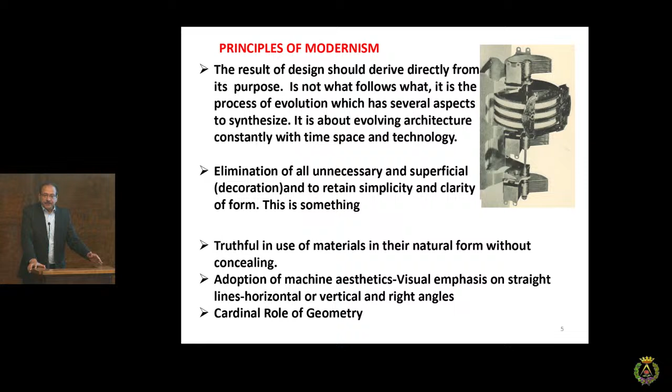Modernism, in very simple words, means we eliminate what is not required, we build only what is important for human comfort and human values. Humanity became an important tool rather than the iconography, rather than the image of a building, rather than putting my name on the building—it was the human comfort. And that became important after the war, when we suddenly realized architecture must shift into a more balanced proposition.

This man—incredible—each time these modern masters walked in Chandigarh, a lot of questions people ask me, so I will try to answer your questions. I have only 30 minutes.

They used to work in a tent outside. At the time, it was all village. A lot of people ask me where did they work—they worked in the tents. All the drawings of Chandigarh were made in his Paris office, and the Indian architects translated his drawings into construction drawings.

I must also tell you, at that time there were no computers, no RMCs, no mixed concrete. So those images of a 5-story building with a ladder and a lady carrying molten concrete on her head to the 4th floor, dropping it sometimes with a child on her back, are amazing.

When you see a building, you see it in its time frame. You appreciate the times it was built. And Chandigarh, of course, is timeless. But I need to tell you what makes this so important, even today.

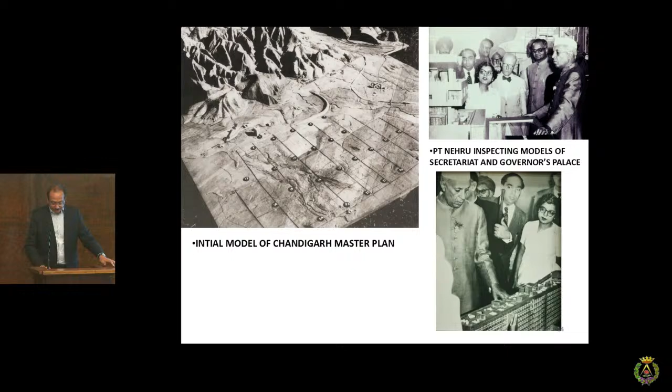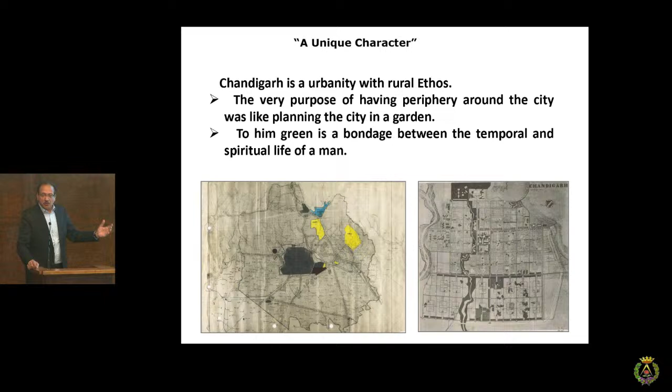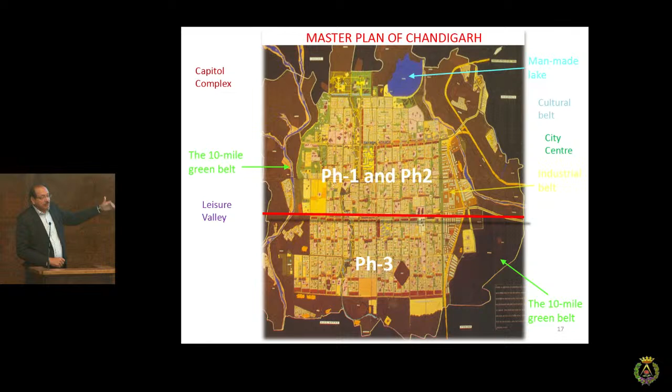Architects are not builders, they are visionaries, and I'm so blessed to be in this place where this college has given so many visionaries. He knew the importance of growth, and he wrote it in his books, the Edicts of Chandigarh, how the expansion must take place. So therefore, in spite of all this expansion, there is no chaos, there are no roadblocks, there is no energy wasted when we travel on the roads.

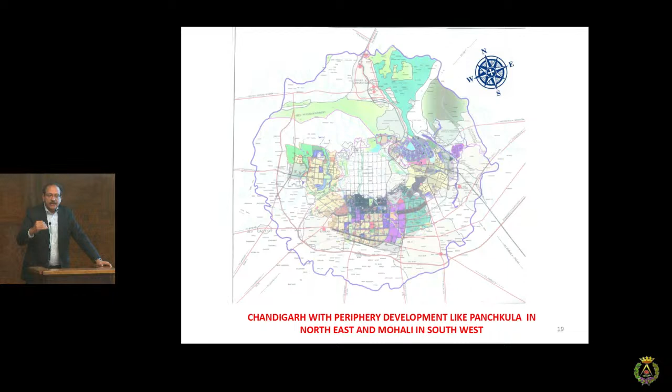The only city which says that if this is the main city, around it I would like to have a green belt so that there is no construction around the city, so there is no pollution and no interference. This is one of the greatest gifts of the city.

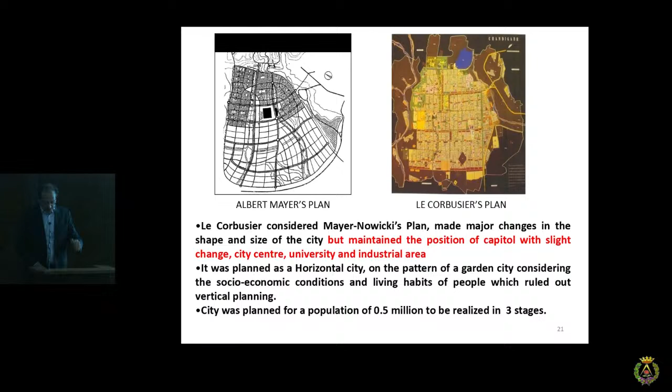Le Corbusier said that the future belongs to the automobile. He knew that looking straight was important, and this is why his master plan is straight.

Only city in the world which has got 7 types of roads still in use. The pedestrian, as the speed grows, the road becomes wider. The cyclist, the pedestrians, the main road, coming into the sectors—it's all very beautiful.

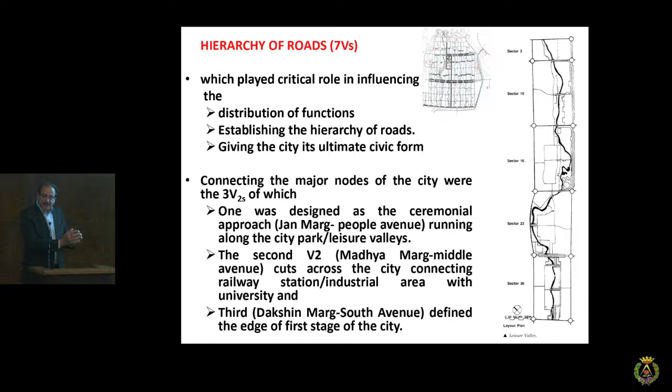Every sector in itself is a city in itself. And it's amazing—how can somebody think of a community living? They say it's not very contextual, it's not very Indian. It is, because this is how we live, as a part of community, and every sector is a part of community.

It is important for 10 minutes to tell you the history of Chandigarh before I talk to you about anything else.

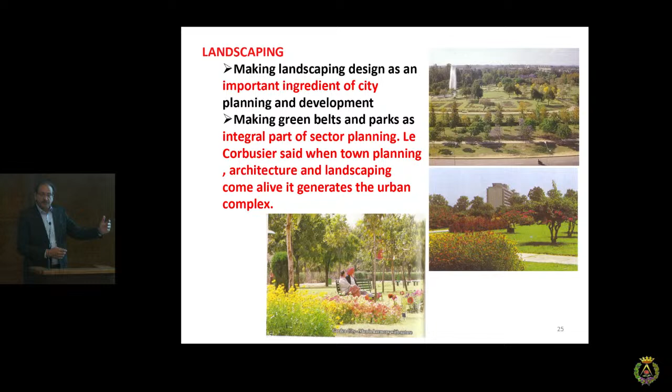The green belts are actually governed, they are maintained, and they are still green. 70 years on, what you see today, the city of Chandigarh, was what it was 70 years before. It's the same.

Le Corbusier did only 2 things in Chandigarh: one was the master plan, and the other was the capital complex. Nothing else. Everything else—the housing, the schools, the civic buildings, the hospitals—are done by other architects. 4 foreigners made Chandigarh: Corbusier, his cousin Pierre Jeanneret, Maxwell Fry, and Jane B. Drew. They were the ones trained in tropical architecture. They gave us what is called the modern housing.

Everything in Chandigarh is graphical. Le Corbusier is the only architect whose sketches are documented. It's called Sketches of Corbusier. Because what he thought, what he conceived, he put on paper in the 3rd dimension, which got translated into the building. And you can actually measure them.

They're the same. When we were in school, my father used to tell me, please make a sketch in the 3rd dimension. I never did. I regret it, because it took me many years to understand that, yes, we have to draw in the 3rd dimension. The client will not understand your plans—he'll understand the 3rd dimension in scale.

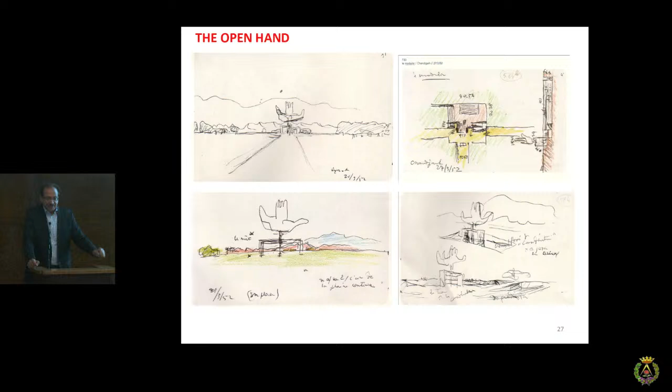We often ignore what our teachers say, but I think we should understand what they say.

An emblem—he did 285 sketches to get the proportion right, friends, to get that right angle of the thumb. 285 sketches. I've written a book, it's called Corb's Capital, which is translated into 7 languages, because everybody asked me the same questions and I had to give them the same answers. So I wrote a book and said, okay, don't ask me, read it.

I talk about the stories of this. He died without seeing this emblem made, but this became a symbol of the city—a hand to give and a hand to receive.

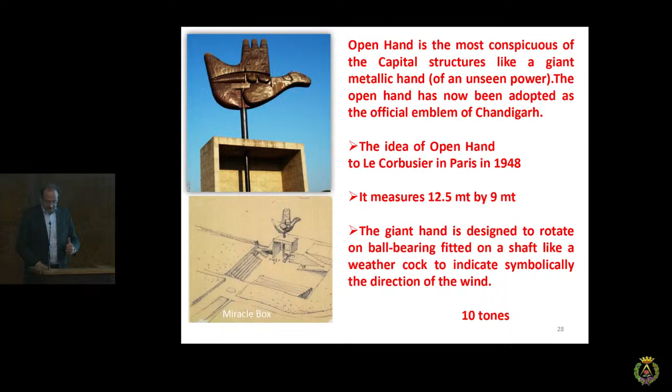These are very rare pictures I have. This was at the time when this was all barren land, and the hills—Chandigarh has foothills to the north.

And such important decisions, how these masters take them—I'm going to tell you some very great things, how the visionaries take a decision, and how small architects like me can't even think about it.

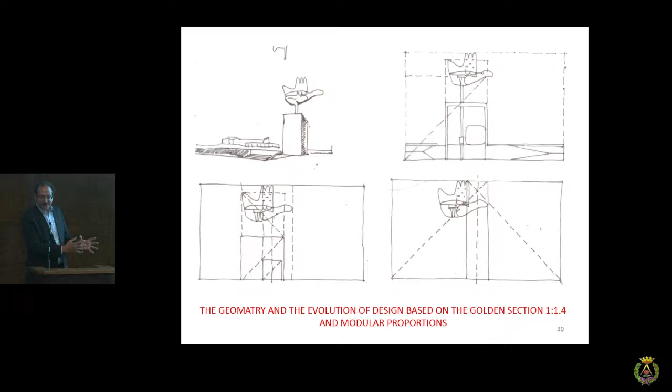All architecture in Chandigarh is mathematics. It's a golden section, golden ratio, 1:1.6. Corbusier said that all architecture is numbers. It's mathematics, it's art converted into mathematics. It's sculpture where people live, where human beings survive. So I'm not going to make a sculpture only to look at. People are going to use it.

Amazing things they taught us. So grateful to those people who did good work. There are very few master architects who did good work but did not tell us the mystery behind it. The good part of Corbusier was he did good work, but he also told us what is good and what we should follow. That's why we have the whole breed of second generation architects whom he trained. And one of them is my father.

People ask me how did they study the complicated climate of Chandigarh. Like this. For 6 months he was traveling and wanted to keep the heat away, and he devised a system of louvers, parasols, the brise soleil, and this was the way it was done. And this became the elevation, the character of the city. We still use this, in spite of being an air-conditioned city now.

A very momentous picture where the model was presented to the Chief Commissioner, and the sketch below. The person who made the model did not know French. In fact, nobody knew French in India at that time. And Le Corbusier did not know English. The only way of communication was the drawing. Nobody spoke anything, nobody whispered anything. Just a drawing. Imagine the whole city being made silently.

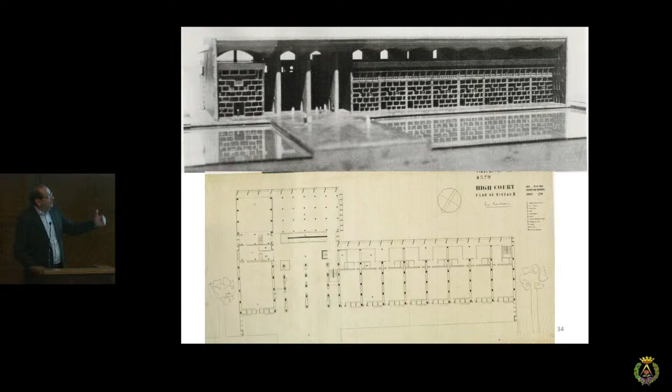Drawings were so simple. The best of the plans of the masters are so simple. But how they translate it into the elevations was their genius. Plans are never complicated, that's what they taught us, that's what my father tells me, that's what I follow. But how you bring them out into the elevation is where your skill as a painter, sculptor, poet, artist, everything matters.

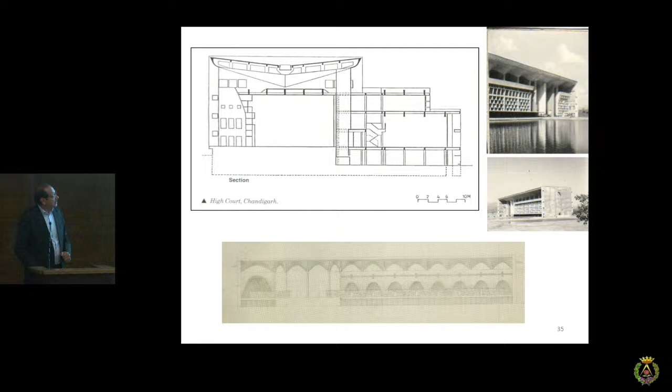I just told you that he says all architecture is mathematics. Everything can be gauged, measured. There are a lot of stories which my father told Professor Rosa when she came to India. He's asking about the measurements of a table, and my father said 'approximately.' He says, don't use the word approximately, tell me correctly. There is no room for approximation. Look at the dictations of these masters.

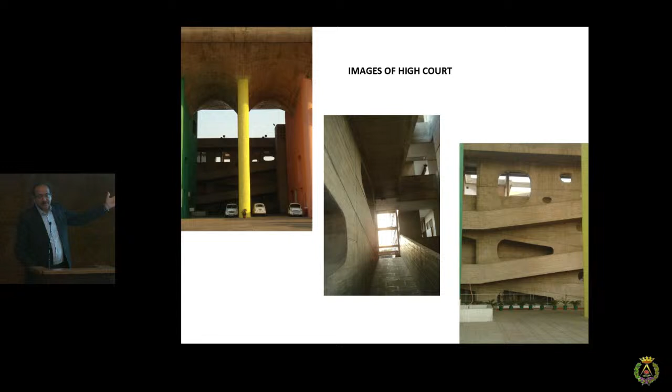And the colors are all original, friends. Nothing is done to this. Look at this, the pristine concrete with some colors. It's the same.

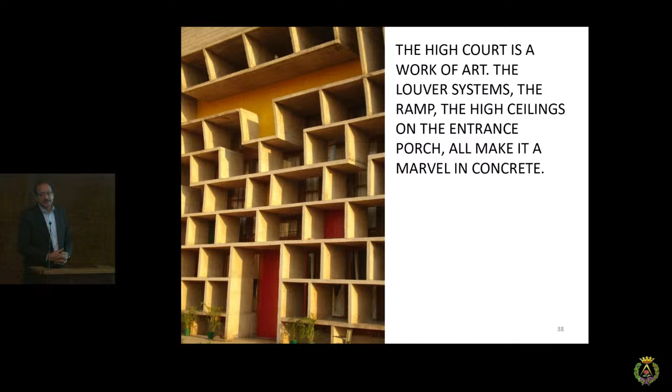I feel so privileged because now I am part of the committee who preserve these monuments, so we carry forward these kinds of things.

I must have been around 3 to 4 years old when my father worked with Jeanneret, his cousin, more closely on various houses after office hours. So he used to come to our house sometimes. And vaguely I remember — I wish I had known he was so important, I would have been on his lap sometime.

The tapestries are all art. They call it scientific art because they are acoustic tapestries for a purpose, for a function, but they are art. It's art into function, mingled to be good to look at. Whatever we do, he says, it must be good to look at.

The Capitol complex, the High Court. A lot of people ask me, like you, students, when I go abroad talking about Chandigarh, why this triangle and why the vertical? What is the geometry? I don't know — he knew the geometry, and we just look at it. But whatever it is, it's wonderful.

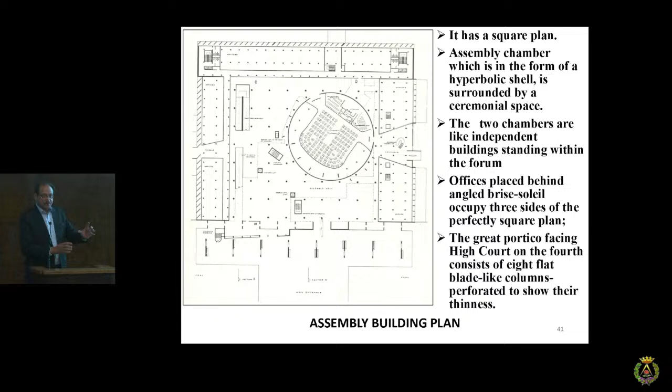A simple plan like this, with the central dome, the auditorium — the rest is the plan. The way you move inside, with double height columns, small columns, you enter, you feel the spaces — astounding.

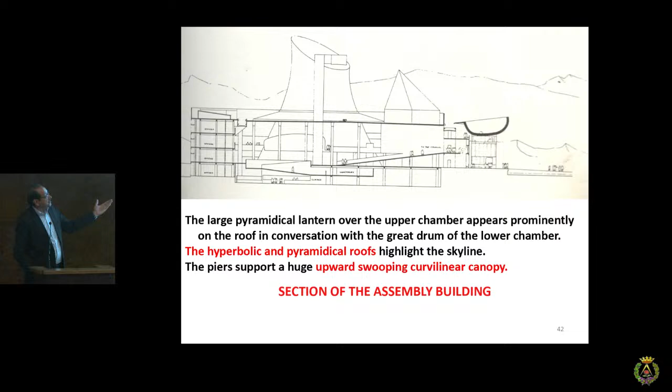One thing he taught us - in the second generation, third generation - is that the section is most important. He says first is the sketch and then the section. Unless you make your section transparent, you will never understand your own building. Very complicated sections they look, but otherwise they're very simple. That's how you understand the proportion.

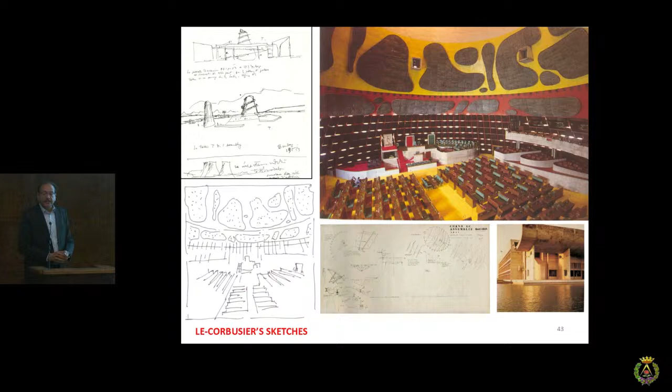Sketch, translation - I especially made this for my student friends to understand how important it is for your hands to move on the paper, how the colors make an impact, the psychology of color. This is the first time the second generation understood the impact of color on your mind. He was, as I was telling yesterday, also influenced by Cubism. Pablo Picasso was Le Corbusier's great friend, and his paintings resemble each other in terms of influence, not imitation.

Jeanneret said that beautiful buildings, like beautiful models, are best to photograph. If there are angles to your building where you can photograph, that means you have achieved your goal. Now look at these images.

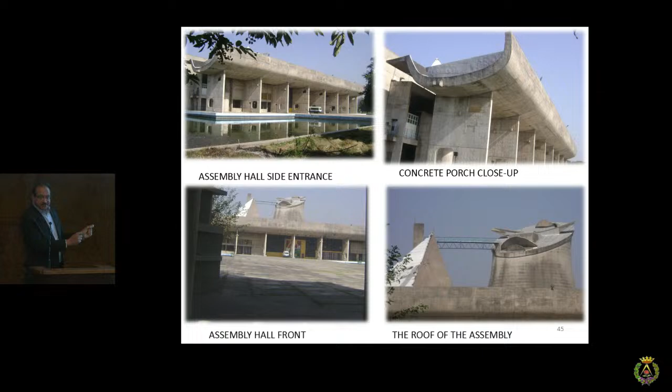Every small aspect of this building is a story in itself. That is a water spout - it's a gutter for rainwater collection, but that becomes a part of the porch. That becomes sort of an iconographic element in itself. Every part of the building is an icon in itself, not just the building. The building is a masterpiece.

This is the caliber of modernism. Someone told him, why did you not face your 300 feet secretariat parallel to the hills? There are hills that side. He says, that's the respect I have for nature. One monument cannot face the other monument. And therefore my building is not parallel, it's perpendicular.

If it was me, I was joking yesterday with my students that I would place my building in such a way that everybody has the view. That's not important - the respectability of the hills is important. And now we realize if that was done, all the roads would be blocked. Now, from all the roads, we can see the hills.

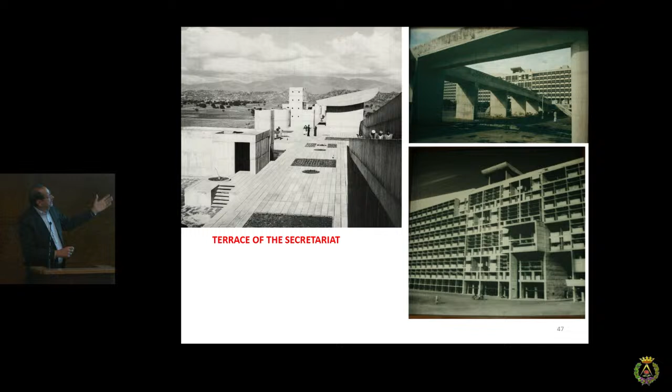You know the philosophy of Corbusier, of course, everybody knows. The only treatment done was the chief minister's section outside; otherwise the elevation is very straight. The terrace is absolutely used. It's all beautiful. Simple plan - one ramp here, other ramp here. That's it.

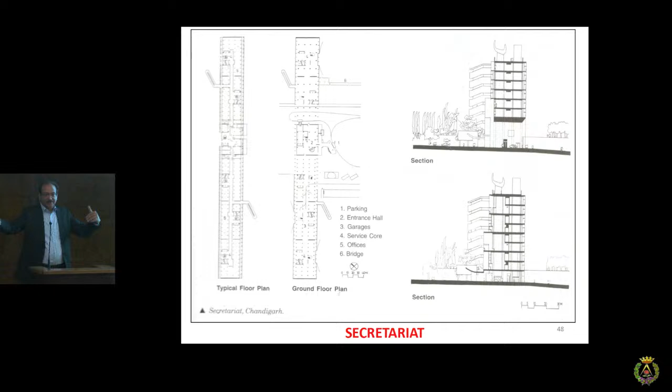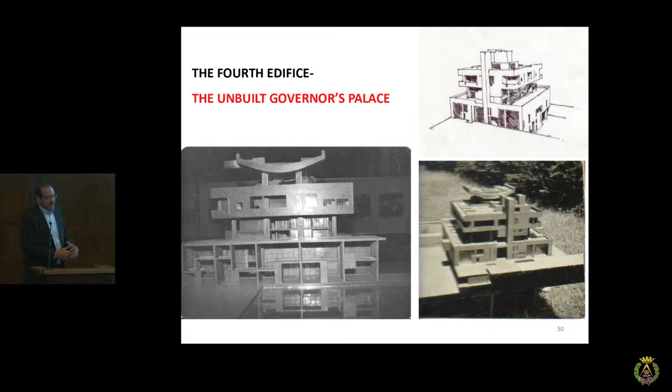Architects have their problems everywhere. When he made this building, the Prime Minister said no, it is too big for the governor - so we don't have palaces. So he made this design, which was very bad. He never wanted this to be approved; he wanted that other one to be approved.

This is a kind of complex buildings.

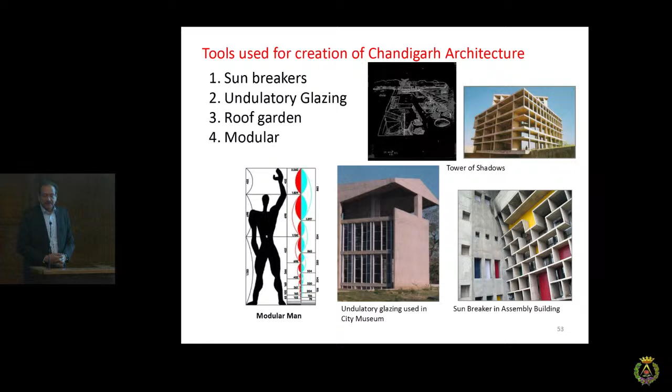Scale - Leonardo da Vinci made one scale, Corbusier made one scale, and nothing else in between. He wanted to measure what he does, and therefore he made this modular. A lot of people don't understand modular. They said that the person who knew modular is no more living - the system of modular died with Corbusier.

He made 3 museums in his career - one is in Ahmedabad, one is in Tokyo, one in Chandigarh. This is the only museum in Chandigarh which is most functional, most visited, and most beautiful.

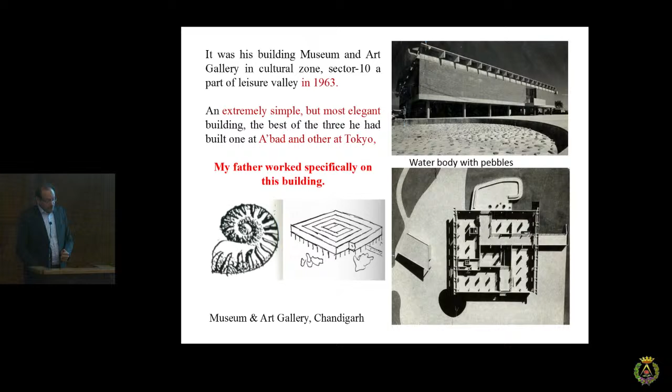When this museum was at its foundation level, he died. My father was working with him as an assistant architect, so the government told him, please carry it forward. Imagine an assistant architect having to think like Corbusier and make all these details - what an amazing story. So he got this building completed when there were no drawings, just the foundations. But they had a sketch, and that sketch gave them everything. So just imagine if there was no sketch of the third dimension.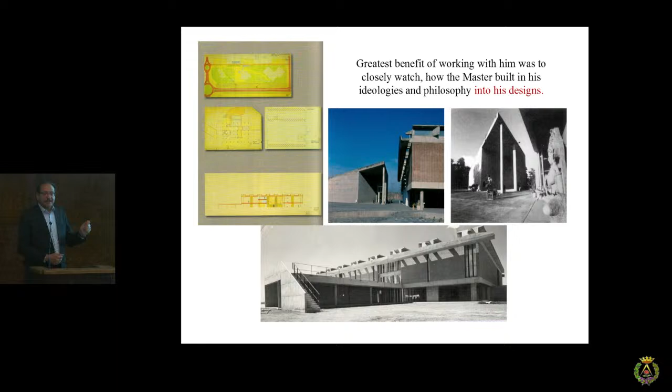Look at this building, old picture and the new picture. Then on the master plan, there was a cross like this. My father said that maybe this was a part of the pavilion he did in Switzerland, in Zurich. So he took that as an inspiration, made it into concrete, added a ramp, and that became a city museum.

All these museums, we have done the interiors. We have all of Corbusier's drawings and paintings exhibited here. So when people come, we have 4 to 5 museums in Chandigarh to visit.

It's all very nicely exhibited for the people to see. How do you tell the story of a great city or a great master or the people who work under him in 2 days? It's so difficult. So we try our best so that all these museums work very efficiently.

At the time when squares, rectangles, and other straight geometry was functioning, my father made one of the biggest rotundas at that time, in 1965. It has no structure system, it is all on the bricks. It's a museum of evolution. The whole cultural belt is designed by my father, and that's how these buildings are so important.

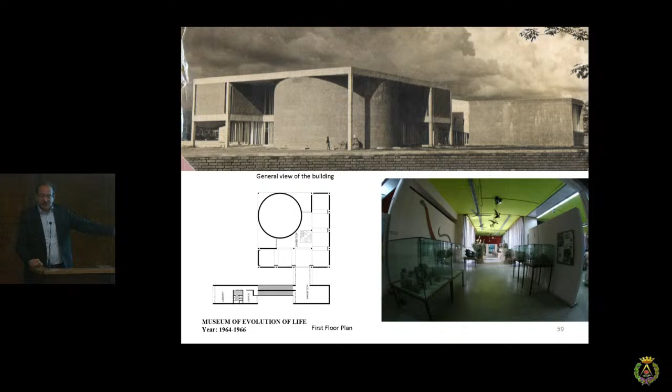So you need a lot of courage to go beyond, a lot of courage to break those barriers. What he teaches us is that you learn something from a master, then you break the rules yourself, keeping the values intact. We carry forward, 3rd generation, myself, my son, we do not imitate images. We do not carry forward what is built. We have our own language, but we know what is important.

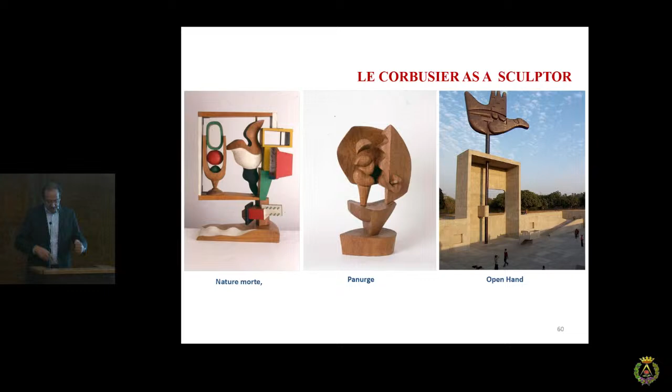As I said, he was a world teacher. Thank God he could write, thank God for these printed books, that we know so much. People often make things and then they die without telling us how to do it well.

Everything in Chandigarh is worth a research. Buildings is one thing, beyond the buildings is other things. Small benches, the bridges, places to sit, the skylights, the street furniture, also amazing. Every road has got a different horticulture, different kind of trees, based on the sun path.

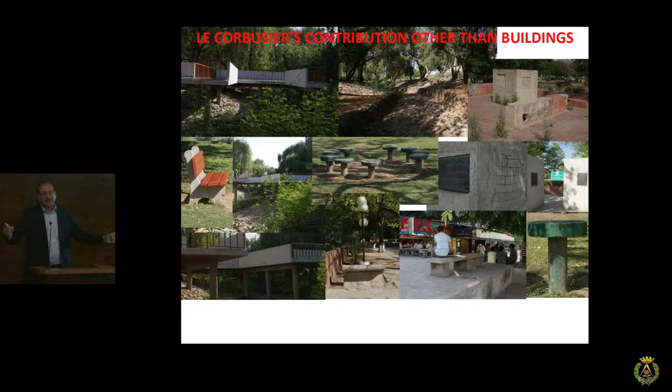Le Corbusier always had a big circle and a north point on his drawings. Sun tells us what to build, sun tells us how to do it. And that was his efficiency.

Every street furniture, everything is so beautiful. And the emblems, the elements which he uses on his buildings, he leaves traces of art everywhere. He leaves traces of light. That amazing light which comes from the skylight is so magical.

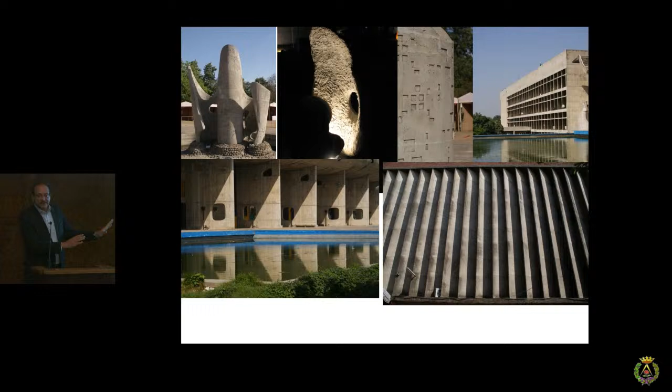Sculptures, the louvers itself is a part of art. Somebody asked him how it is a part of art. He says because when they clash with the sun, they create sciagraphy. That shade and sciagraphy is art. Rest is building. We are not looking at a building, you're looking at the shade of the louvers. That makes it different. My goodness, what a thing which he taught us.

Look at all this, it's beyond the buildings. It's beyond something which you can actually understand.

This is the whole set of generation of architects which they taught and left behind. And if you ask these people, they're so grateful. They did not go to any great school of architecture, they did not do any masters or degrees, but they learned from the master himself, and that's why they could learn architecture so good.

It was one-to-one, it was just one-to-one. They said that he kept a drawing in front of Corbusier, he would just make one round like this, and that was the error. Even today, after 30 years, I still show my plans to my father. And he says, no, it's okay, you don't need to show. I said, no, please see. Where his eyes stop, there is an error there. Even today, he tells us that there's an error here. So the difference of experience never diminishes, it's always there.

The first building, after the tents, they moved into the first building they made, and they worked from this building. Stone, what was available, columns are made of stone, natural ventilation, jute, and louver systems, it's all sustainability at that time. Brick floors, brick structures, no concrete. 60 years of sustainable living.

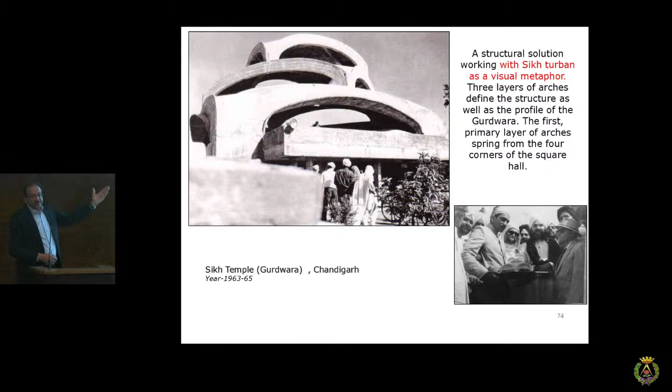This is the Sikh Gurdwara. Sikhs in India wear the turban, so this Gurdwara is shaped from the turban. And at that time, no columns, columnless, a big hall, in concrete. Just imagine at that time what courage somebody had.

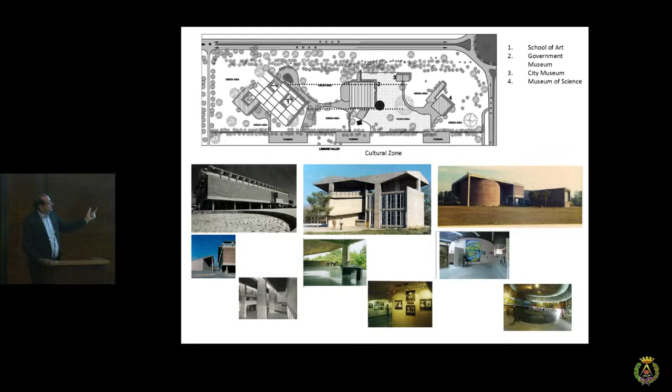And this is the kind of museum which my father built. The interiors also align with the building. I had to tell you the story of Corbusier, Chandigarh, and concrete, the three elements which make this area so beautiful.

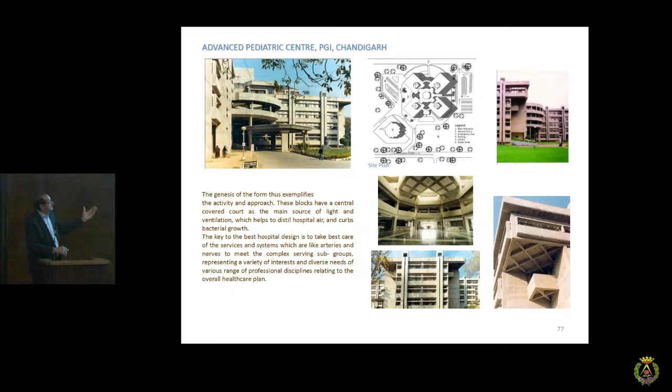Then we carry forward. I joined my father, and this is the kind of buildings we do in Chandigarh. When we're making public buildings like hospitals, it's all in concrete. But that does not stop us from being intelligent people, it does not stop the technology. We are not imitating what was built, we are carrying it forward. Concrete, of course, but then look at the cantilevers, the structure system, the services, vertical and horizontal. It's all there, it's all modern, 10 years ago.

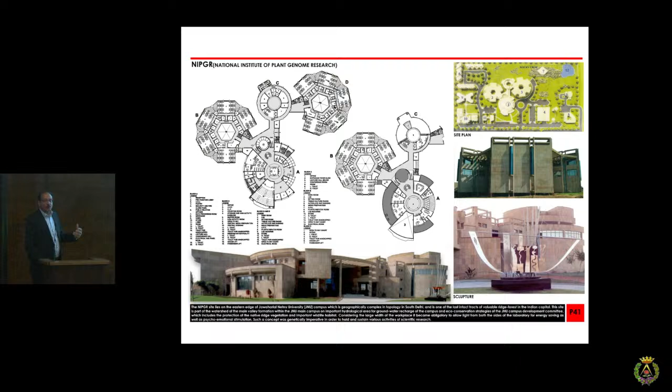This is our project in Delhi. Laboratories, circular laboratories, art is a part of it. It's also beautiful. This is all stone cladding because this campus in Delhi is clad with stone. So we are growing, evolving, making our statement, making our architecture. What we learned, we're carrying forward, we're giving it. This is a cafeteria.

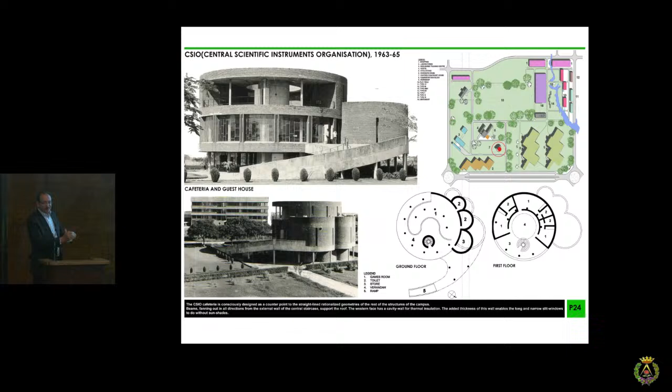In the 60s, it was done. A lot of opposition came, but he did it. I'm making slides go back and forth to keep your interest alive, lest you sleep.

7 years ago, this building by my father. It's an IT building, that concrete parasol, the use of appropriate glass at the time. Look at this plan, every area, every room, every office has an outdoor extension.

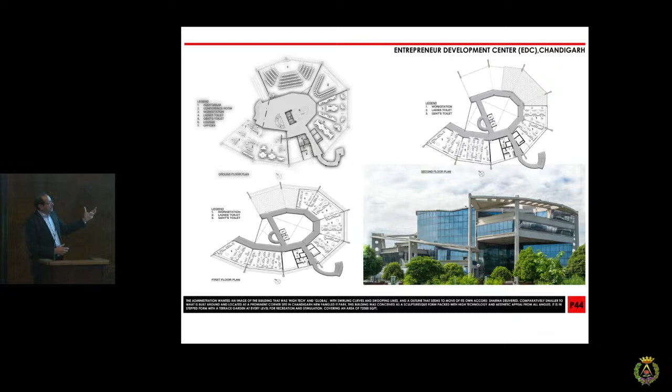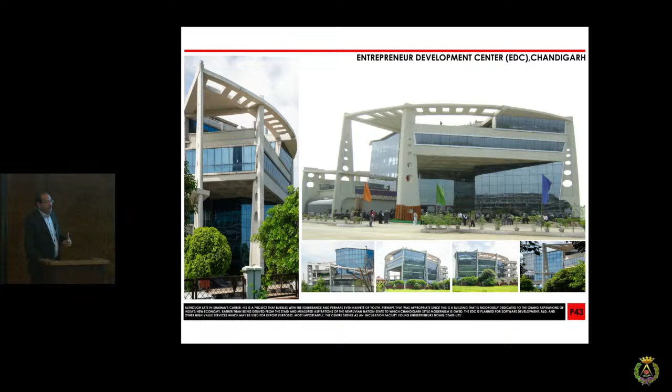85 years old, amazing stuff. The first time I talked to the government to get this approval, it was approved. It had such a strong image that this is now an emblem of the Chandigarh IT Park. Several buildings have come around it, but this remains very iconographic. So, carrying forward, you're growing, and that's what he tells us.

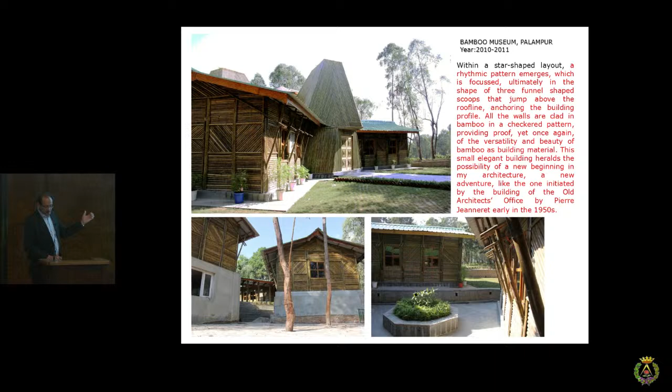Concrete, back to bamboo. This is the Bamboo Museum in Himachal, made by the bamboo, for the bamboo, designed by this man. Look at the details, the play of light, the natural light which comes in, the mystery of the light which affects the bamboo. It's so beautiful.

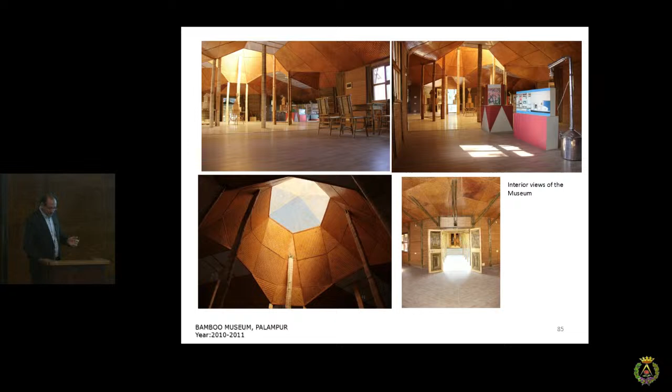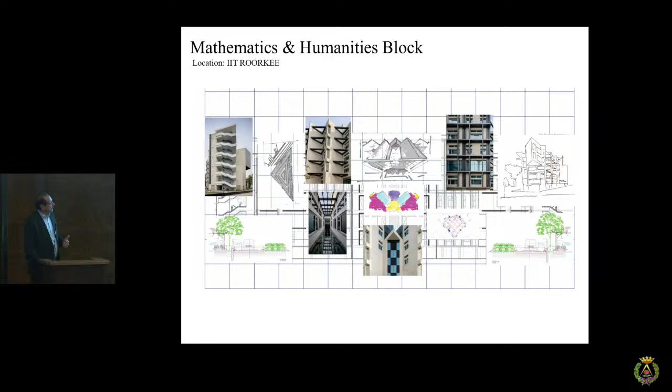This is one of my projects in the campus of IIT Roorkee, one of the very major institutes, carrying forward the times to which it is built. It's a zinc cladding building. The iconography is there. The boldness of architecture has been taught to us, but how to bring it forth based on the principles of the site, the sun path, the function, and the utility is this.

Suddenly you understand, after working for 10 years in the studio with him, like every other person, then you understand how to go about yourself. He did not give us any independent project for 10 years. I was working in his studio for 10 years, and I was the one who got the maximum scolding.

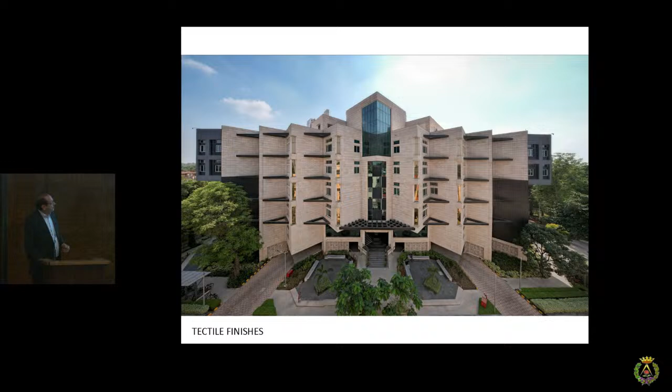The front elevations are like this. There is no front or back elevation, my father says. Everything is important. The whole siting, the whole of the interiors, is all very modern, very modernistic. If I need light, I have the glass floors. If I need diffused light, I have the jalis, I have the calligraphy, but it's all there. It's all the first time in 100 years we gave this institute.

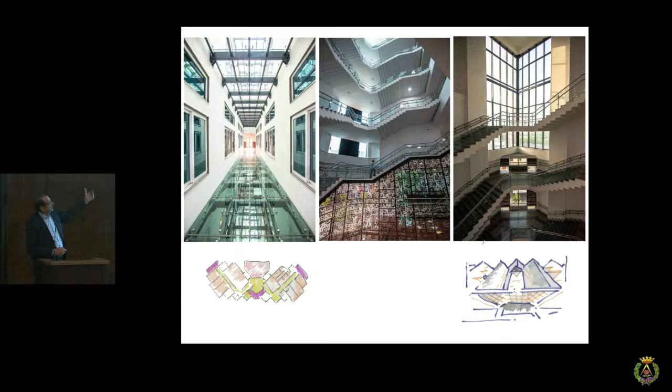And of course, these are the sketches I follow. I learned it from the masters, I also follow. First I conceive through the sketch and that gets translated. It's a collage of when a project, I show it like this to start with.

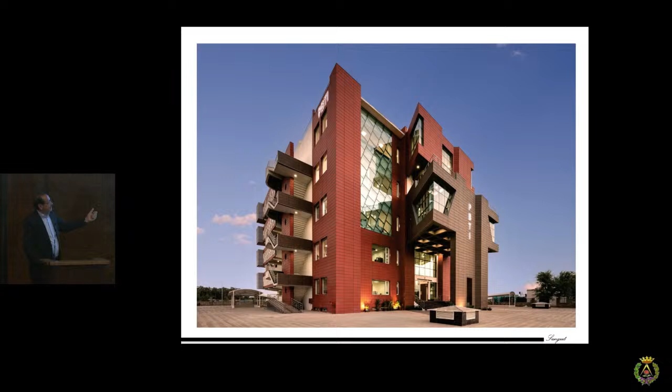This is a laboratory which I have done, again in Chandigarh. Imagery is the same, our approach to architecture is the same, but what is important is the function of today. And we do it our own way, as I said, that this is how I wanted it.

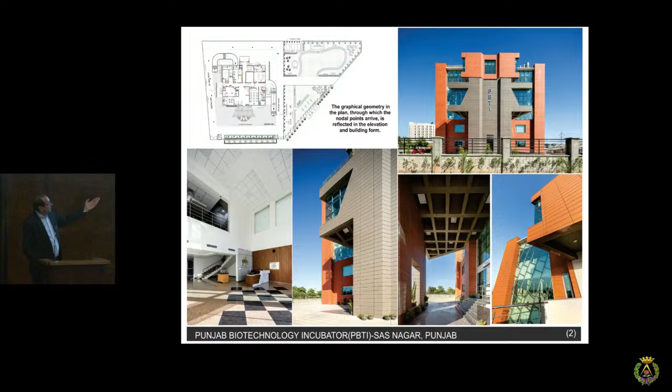If you can see the image in the front elevation, it's very, very critical - the central porch, the interiors, the service corridors around it. This is the imagery of the building. These hands are showing that the whole laboratory is very beautifully held with two hands of services, because this is what matters.

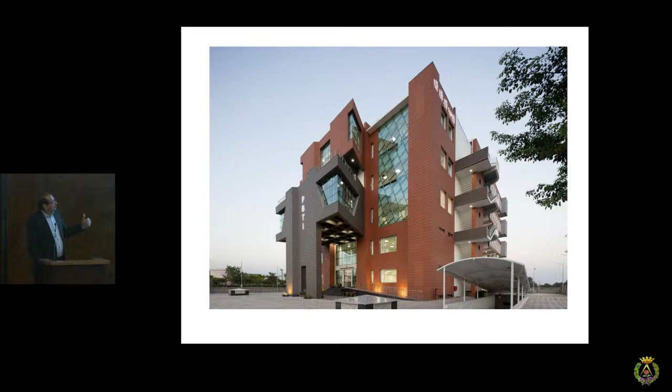Just telling you how we can approach anywhere. We are based in Chandigarh, but we're working everywhere in India. It's a large complex, green building, 4-star GRIHA, all the parameters which are used for it. We have a lot of breeze here, so...

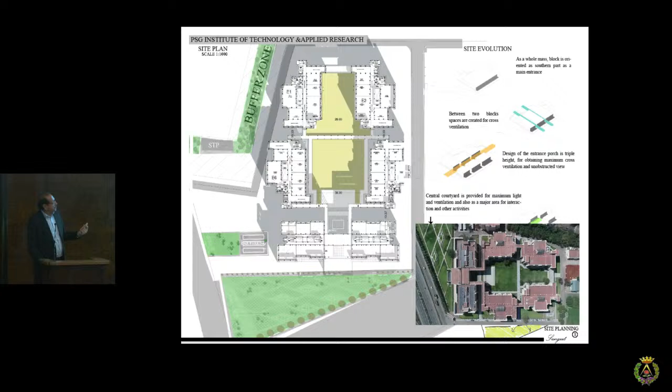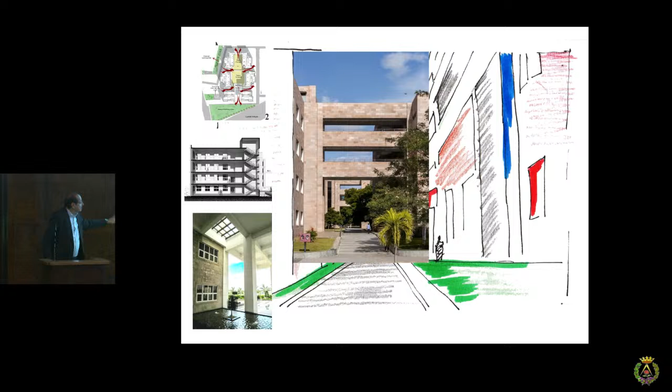Did somebody do it deliberately? No, this is coming here, it's not up - got it. So the sketch here, the corridor - because the climate is different, this is how I had to treat it like this. This is a museum in Coimbatore.

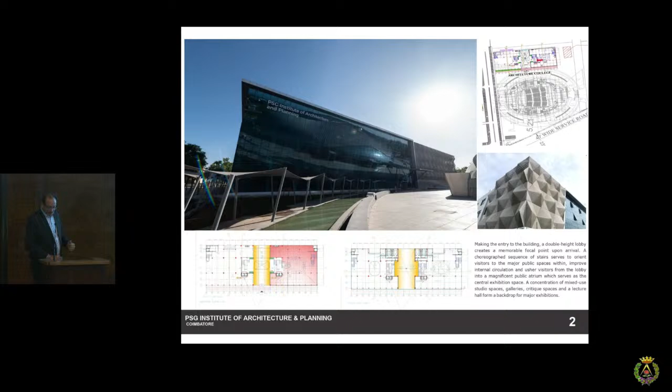Very, very ultra modernistic, where you have the latest specifications, latest materials. It's the first engineering museum, and this is my School of Architecture in Coimbatore, where I am the design chair. I built it as a consultant, and then they asked me to run it also, so now I go there in two capacities - as a consultant and as an employee.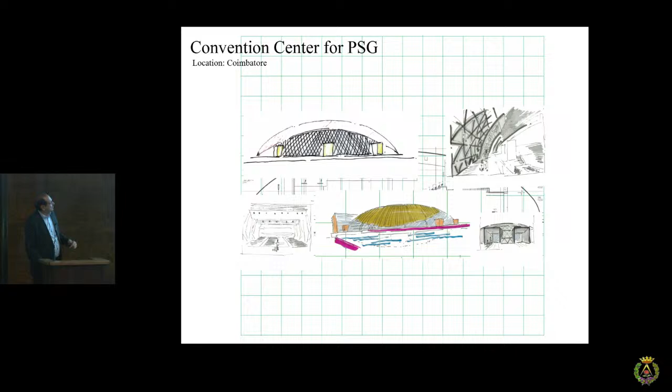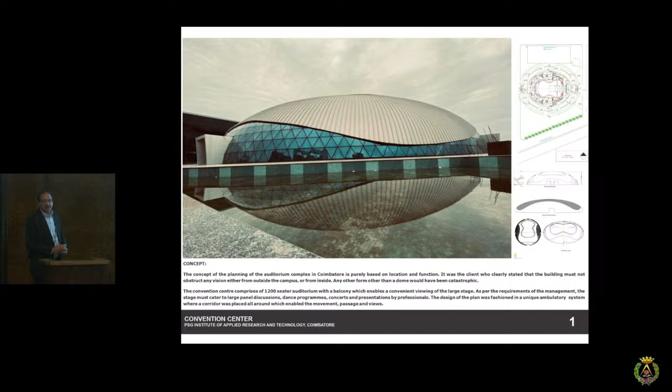Last project is the convention center in the same place. It's a 1200 piece of architecture which I designed there - so different, so with the times. But they wanted one convention center, and this is what it is. You see this from the top.

Every building lifts the stature of a city. Who knew about Azerbaijan and Baku and all those countries before Zaha Hadid made a building of her own? It lifts the stature of the city. Chandigarh lifted the stature of the whole nation, the whole of India. This is what these buildings do.

Great to have clients like this who allow us to do this - they have faith in us. You build faith over the years with clients, and that's how it is done. So this structure system, interiors, cross ventilations, the corridors, and that magical light which comes through the corridors is so beautiful. I always get very emotional when I speak about these things. And you walk here, you enter there, you walk here and come inside this.

So this is the state-of-the-art auditorium inside, with curved glass. First time in the Asian subcontinent, the glass was curved like this. It was very difficult to convince the Saint-Gobain people, but this happened. Everybody gets excited when the project is inspiring.

Not ambitious, inspiring. And that's what happened in Chandigarh, because the buildings were so inspiring that even the workers wanted to work on it. Everybody was putting their best because you are inspired, not because you're getting your bread. No, it doesn't happen like that. These are the projects where everybody was inspired, so they said, okay, let's do it.

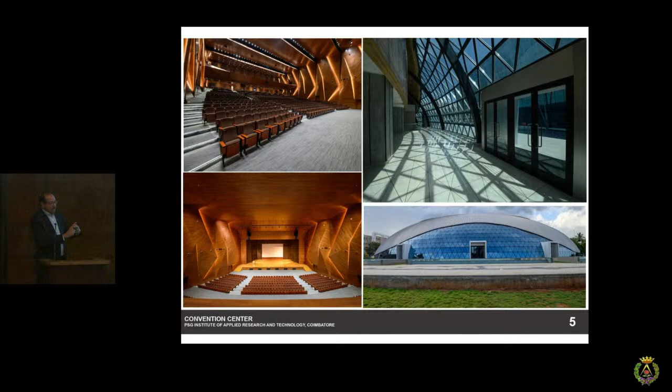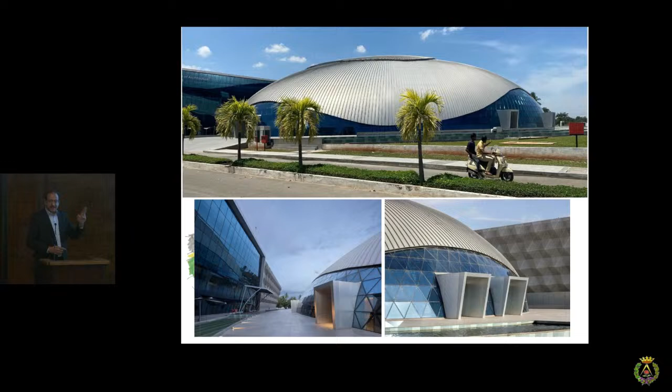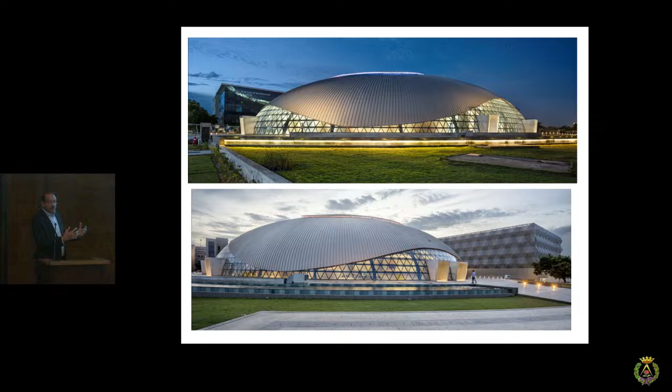We haven't done this before, so everything is different. The triangulation structure system is so difficult, the most difficult. Insulation was also so difficult. But then this became an icon, a symbol of the city of Coimbatore. And I'm so proud. What I learned in my 57, 58 years is the culmination of this. It does not resemble what I learned, but it conveys the same meaning. The landscape, the lighting, the inclusion of everything became a part of and symbol of these buildings.

So, global images, but they're very functional. They are made for that city. We don't cut and paste. You're not lifting something from Instagram and putting it here. They are made for the site.

It's like this - we need it. Because we need it, we design it. And suddenly we are so thankful to those masters, those teachers, our family, fathers, and faculty who taught us how to understand architecture and then implement it. Not first you do it and then make a story - it doesn't happen like this.

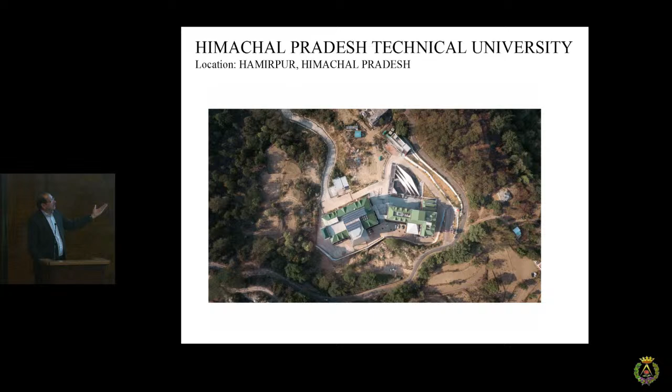Comfort, most important. Value of a human being, most important. We start from that. This is a project in Himachal, in the hills. Look at the understanding of the hills, the sustainability. I can make a concrete building on the hills, but I will not do it. I'm not trained like that. I've been taught to make a building where it must reside.

This is hills, I love hills, I respect hills. But I can always give some shapes, some colors - my technology remains the same. So this is a university in itself. My combination of the geometry which I learned, I am implementing - I'm carrying forward the geometry. I told you, geometry, mathematics, science, technology, golden section, materiality - it's all there. I'm carrying it forward.

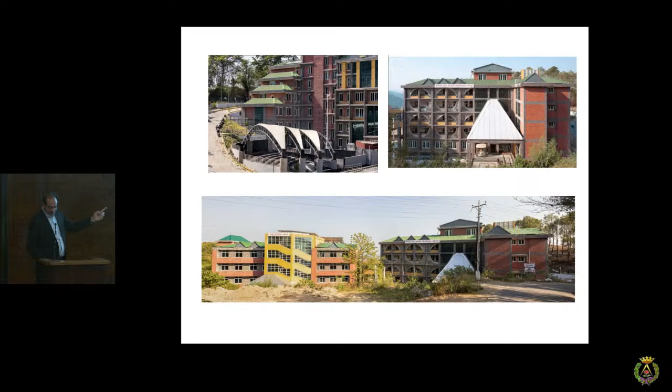You can see a good image - that's a triple height porch. Look at that feeling when you enter into a triple height porch. It's so inviting, it's so good. It says, okay, come, I'm going to teach you here.

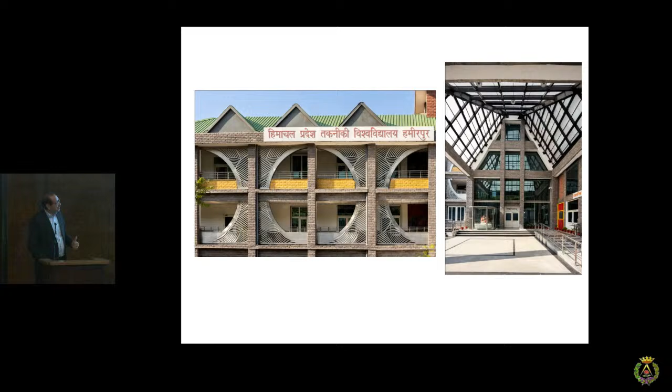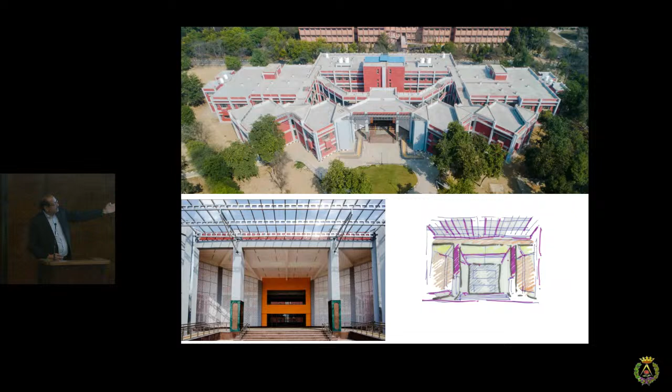This is the stainless steel balcony. It's on the hills, it has a history of 1,000 years. I must respect where I'm building, therefore it is like that. If you're making a school in a village, it's like this - I have the system of a filigree, of a great wall where I have the light, that sketch transforms into this. But it's all very domestic, very low-rise. The entrance is glittering, but other places are all bricks, corridors.

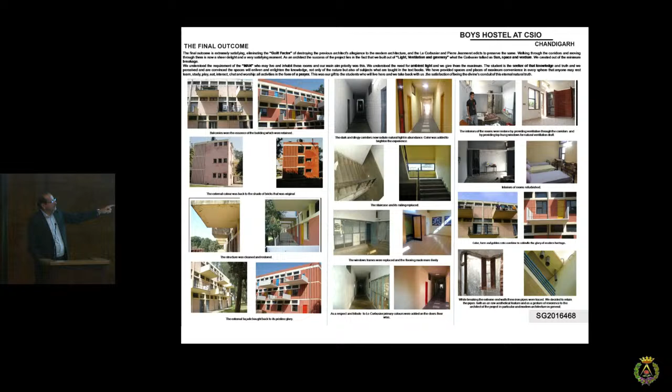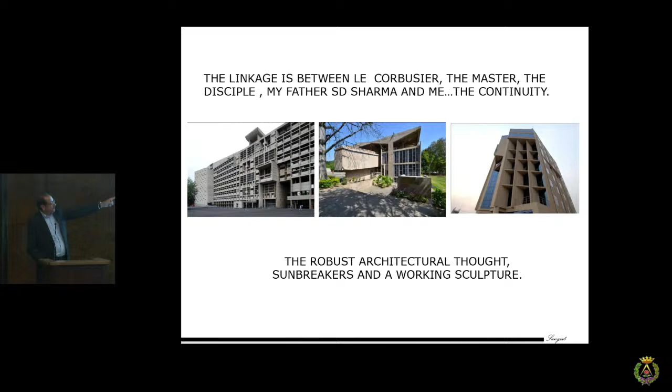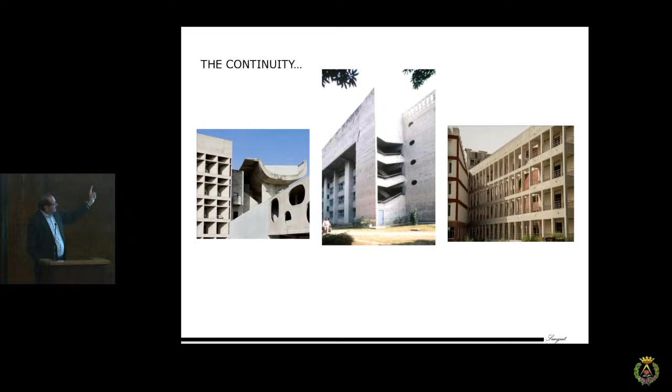When I retain buildings in Chandigarh, I respect the old. When I'm asked to change, I don't break, I simply bring it back to the shape. That's how we preserve, that's how we conserve architecture in Chandigarh. Just a continuity - that was Corbusier, that's my father, and that's me. I know I'm not that good, but it's okay, I'm showing you that. This is Corbusier, that's my father, and that's me. I live in different times. This is the continuity - the continuity of the thought.

And thank you very much for this time, and I appreciate it.